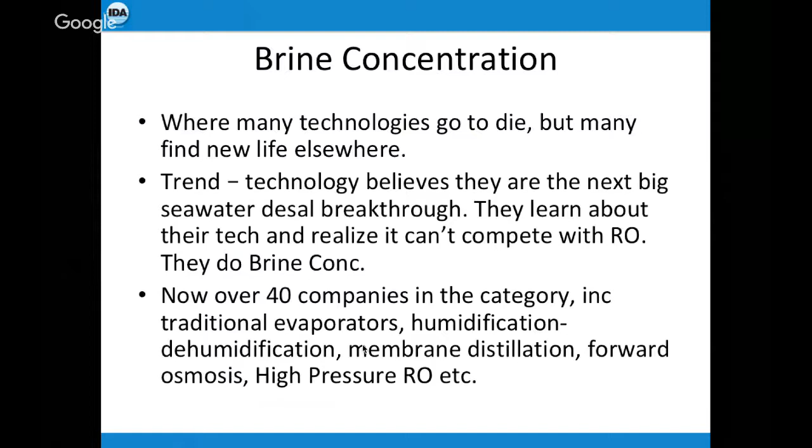So these companies inevitably end up focusing on brine concentration, in that space that reverse osmosis can't really work in all that efficiently. So that 100,000 TDS through 300,000 TDS seems to be the sweet spot that these brine concentration technologies get into that RO can't touch all that well. So over the years, this list of companies has been building up and building up. And Tom Pankratz released a WDR article showing over 40 companies in the category. And they include a whole range of different technologies. So that includes the traditional evaporators, humidification-dehumidification, membrane distillation, forward osmosis, high pressure reverse osmosis. And there's a few others in the niche area as well, but that covers the majority of the techniques that people are using in brine concentration at the moment.

So a key discussion in this area is what happened to forward osmosis. Back in 2008 through 2010, forward osmosis was slated to be the next big thing. And a lot of people, just like I said, were focusing on the seawater market. Particularly Modern Water came out with some very good papers at the 2011 IDA World Congress in Perth. And it seemed to be going okay.

And then in the space between 2010 and 2013, that trend happened where many of them said, oh no, brine concentration is going to be a better way to go. We're not going to be able to compete with RO, so we're going to focus on those higher salinity projects. And in 2013, it was a really exciting space. In fact, we had a YLP webinar on the subject of forward osmosis, and a lot of people tuned in to listen. So people were engaged in the space and were excited about something happening.

At that point, Oasys was slated as being the next big thing. And of course, over the last few months, Oasys has announced that they're closing their doors, or rather, at least they're selling on to another company because the funding has run out for them. So something's happened at Oasys that has meant that getting this brine concentration technology into the market has been very challenging, even though they've seen that there was a huge market in China and had focused over in China quite a lot.

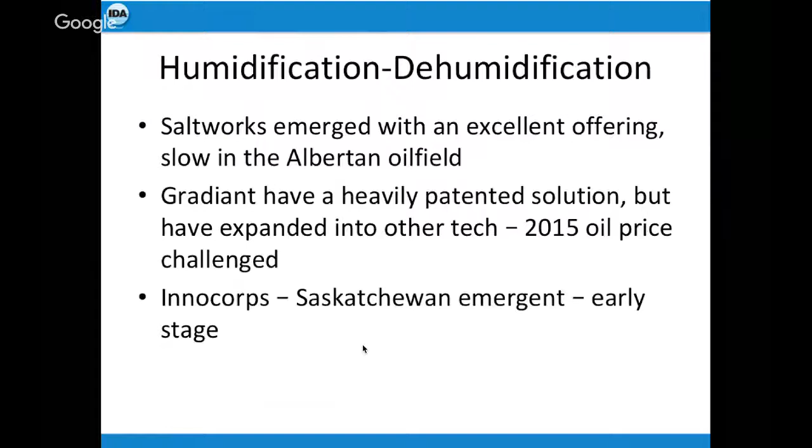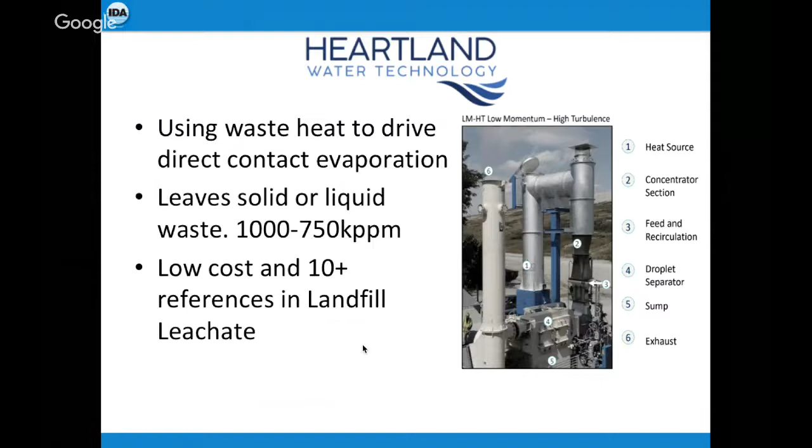So these guys have actually been around for 10 plus years and recently got a new management team that are ex-GE, and those guys are taking it to new heights. So they've already done 10 plus references in landfill leachate applications and have other applications as well, and it's really starting out to go really well for Heartland.

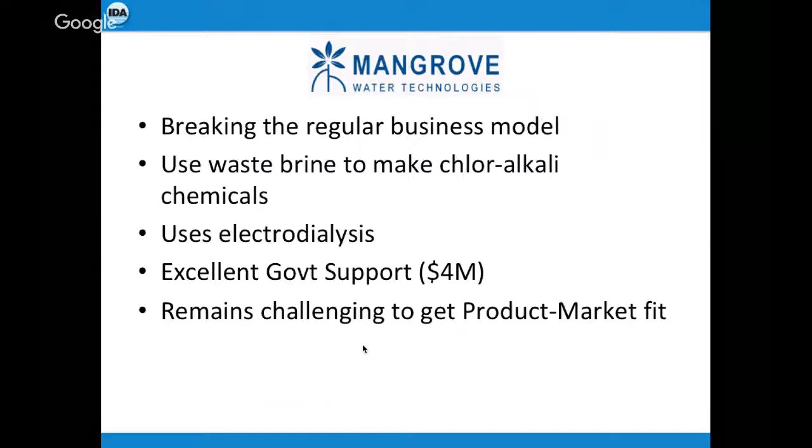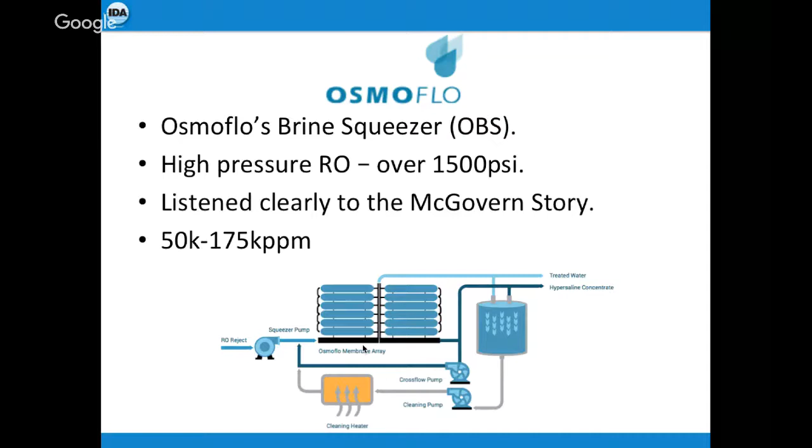Now, 175,000 ppm might not be the be-all and end-all, but the OBS is something that you would put in the front of another brine concentration technology. If you need to go all the way to solid, you would use something like a crystallizer or one of the other technologies. But by putting this in front, it takes the brunt of the work and therefore greatly reduces the amount of energy required in the full system.

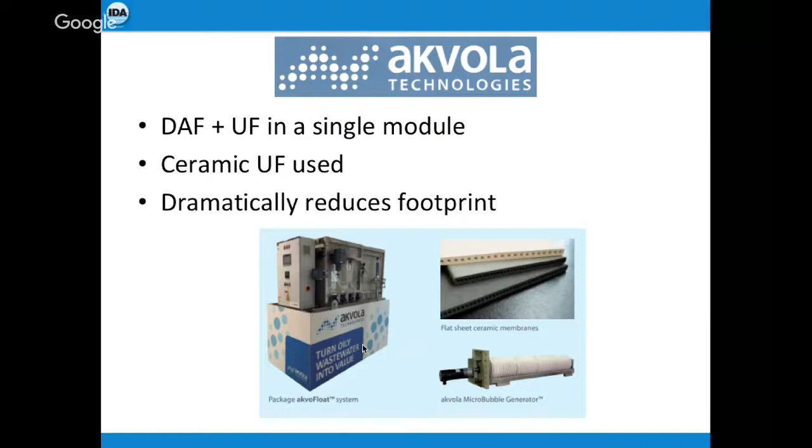Okay, so let's move on to low fouling technologies. There's quite a few in this space. Akvola Technologies out of Germany has a really interesting technology to cut the footprint of the pre-treatment and keep fouling as low as possible. So these guys have dissolved air flotation plus ultrafiltration in a single module using ceramic ultrafiltration modules. So by doing this, it dramatically reduces the footprint, and therefore you're spending much, much less money on preparing your site.

Another one is called Swirltex. These guys create a vortex inside a tubular ultrafiltration membrane. And in addition to that, they inject gas. So by creating that vortex, it means any solids in the material are drawn to the center of the vortex and don't touch the outside of the membrane. So that means that you can go to much, much higher fluxes than a regular UF membrane. In some cases, they've seen up to 5 times the flux that you would see on a regular tubular UF membrane in the applications that they're working in.

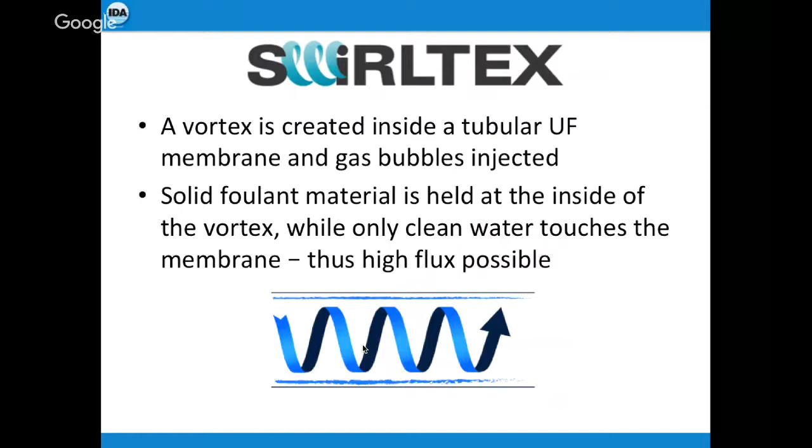So right now they're working in wastewater lagoons, but the application of this technology is great. And I hope over time that they'll see other areas they can get into and really expand the areas they're working in.

Another is Polycera. Polycera is riding on the back of Eric Hoek's success out of NanoH2O and doing very, very well. So their ceramic polymeric ultrafiltration hybrid can get 10x lower costs. So what's really good about it is that it's highly oleophobic, and hence that makes it really excellent to use in oil and gas. So you can see in the diagram below the text here is that the surface repels oil very, very well. So this means that the oil is no longer fouling the membrane, and therefore you can get higher fluxes, but you can also have longer periods between backwashes, longer periods between cleans, and therefore a much, much more efficient system.

So this really solves a problem in ceramic membranes. In places where they've been tried in the oil patch before, the trials have gone really badly due to fouling, and this helps solve that fouling issue. So the surface is neither a polymer nor a metal oxide, it's a true hybrid, so a very, very interesting technology indeed.

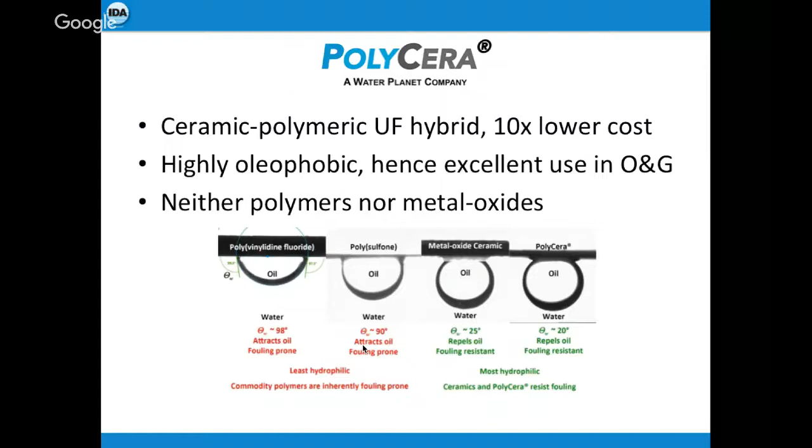So we've got a few membrane companies on the docket today as well. So these guys are really early stage and still developing their membranes. But as we found at NanoH2O, this can be a very long lead time just to get to the point of selling even pilots. So Anfiro has been working on some NF and RO membranes using self-assembling block polymers. So by aligning the polymers, it means there's a straight flow of water, you can see in the diagram on the right there, and thus leading to higher permeability. So because you don't have that tortuous pathway that RO has, you can get these much, much higher fluxes.

And Anfiro are claiming that they want to get up to 3 times increase in permeability compared to regular reverse osmosis. A really big win with these guys is that they're not damaged by chlorine. So that's really going to help the biofouling problem as well. In addition, they're cost competitive with existing materials for roll-to-roll manufacturing, which is really important compared to something like graphene that we're going to get into in a moment.

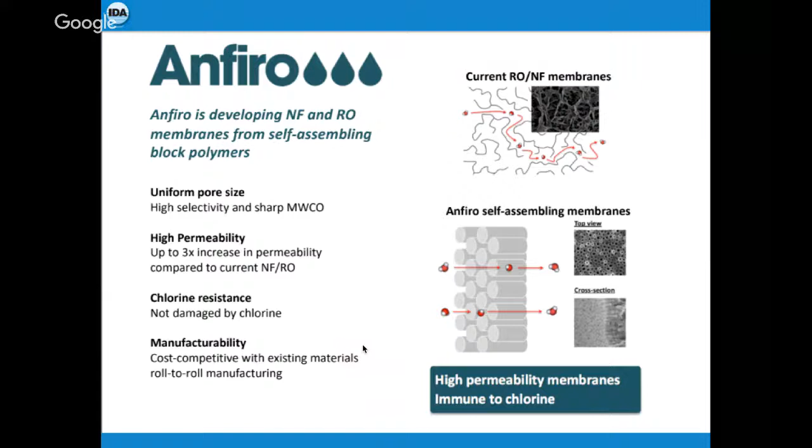Mattershift is another company as well that are looking at new membrane surfaces. These guys are looking at radial aligned carbon nanotubes. So by doing this, you create programmable gateways, only allowing certain substances through. So that really lends itself to desalination, because then you can say, let's tune these gateways to let water through, but not let salt through. And therefore, you can get a really efficient membrane. So these guys are also in the early stages of development as well, but we stay tuned to what they're doing.

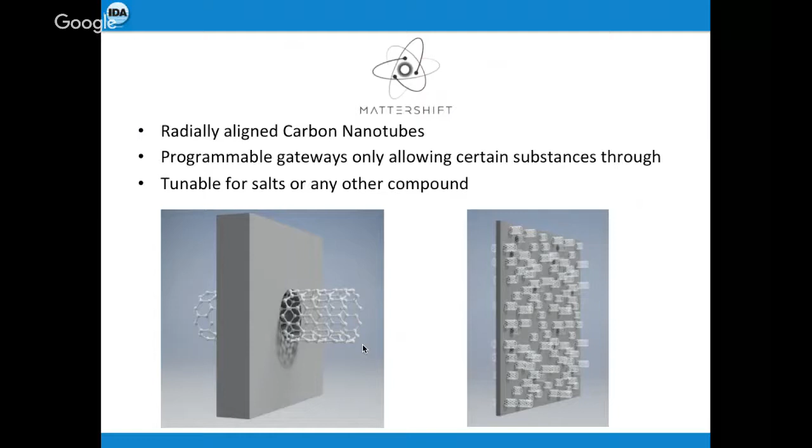So a lot of people have been talking about graphene over the years because it's been slated to increase flux by 10x, or even better than that. So the problem with graphene is that it's been very, very slow to develop. I think 5 years ago, it was slated as 5 years' time. And I don't think that the progress has been made to really get this to the point of being a roll-to-roll or something that can be used at the larger scale.

So Lockheed Martin were really pushing the envelope and were owning the space a few years back and developing things well. Although we haven't heard from Lockheed Martin in at least a couple of years, and it's unclear as to where they're taking this exactly. The other 2 universities that were working on the problem, MIT and University of Manchester, are continuing in the space and making some progress.

So I had a discussion with one of the Manchester teams at the Sao Paulo IDA event, and these guys have now looked at layering graphene inside an epoxy sandwich. So basically they would go graphene surface, epoxy, graphene surface, epoxy, like that, and then make a large block and then shave the top layer off the block, and that becomes the membrane.

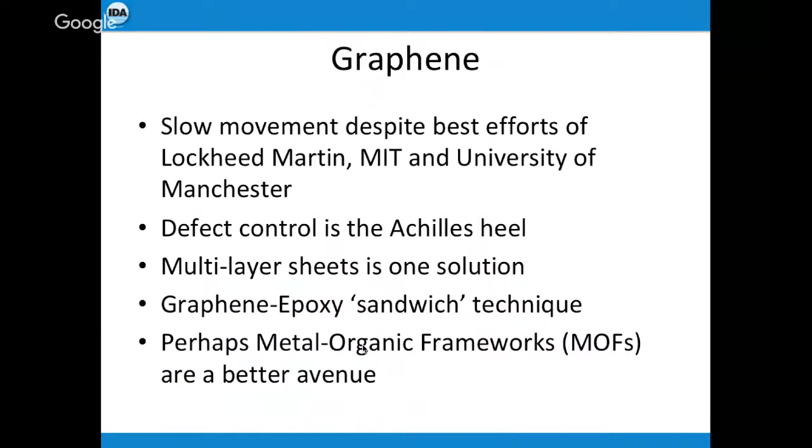Another solution is multi-layering sheets. Because graphene is so thin, it's possible to stack these on top of each other and get the same thickness as an RO membrane. And this takes care of the defect control that is really the Achilles heel of graphene. So we'll see where that goes as well. Over the last few years, another new exciting space has come out, metal organic frameworks. And perhaps this is a better avenue than graphene, although it's early days in that space, and we're all ears to see how that goes.

Okay, so let's move on to low energy pure plays. So one company that's exciting me right now is Pani Energy. So these guys have a technology called adaptive desalination technology, and it's an intelligent seawater RO plant process that adapts to take advantage of the variable demand of fresh water and variable price of electricity. So the process is fairly under wraps at the moment, but it requires a small amount of capital upgrade and then some proprietary algorithms to control intelligently what's going on the plant and balancing flows between certain areas of the plant.

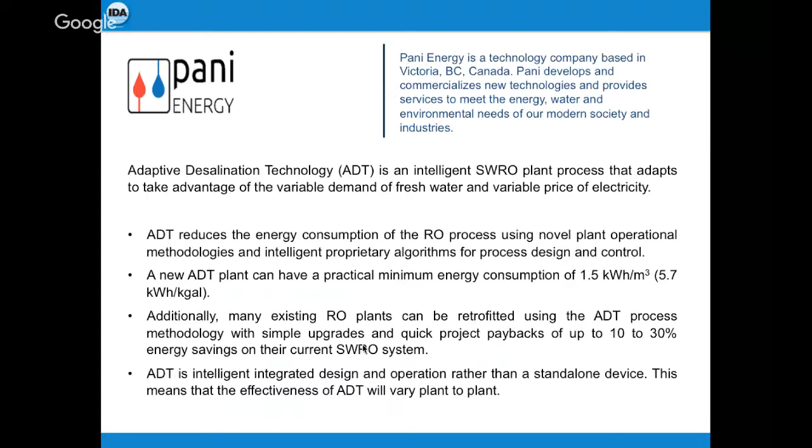So research has been going on at Victoria University in British Columbia on this for quite some time, and they claim that the minimum energy consumption of their system is greatly improved compared to standard at comparable salinities. So these guys are really getting into the space now, looking at some pilots, and I really hope something goes well here, because I think there's good potential here after it's been proven in a first and second pilot.

Another way of looking at things is changing the flow-through nature of RO and focusing on batch and semi-batch processes to greatly enhance the energy. So this really requires a serious mindset change, as does Pani Energy as well, in that if we do things slightly differently and we construct and design our plants slightly differently, then we can save a lot of energy. But this requires quite a lot of proving period to get to the point of the industry being comfortable with what's going on the research side.

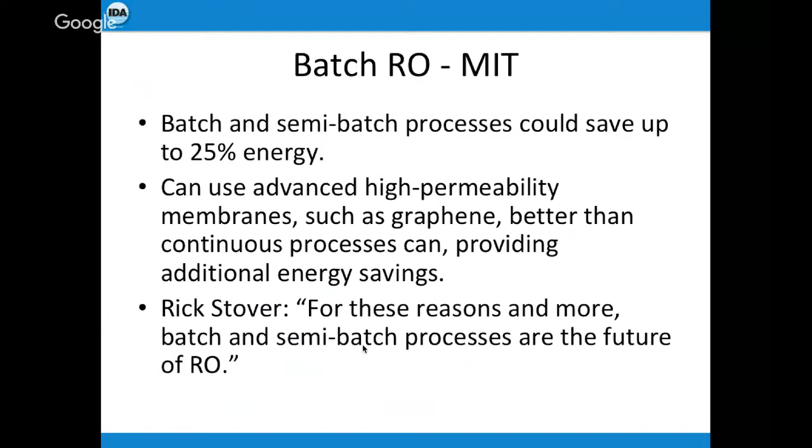So batch and semi-batch, and by semi-batch I mean things like Desalitech technology, could save up to 25% of energy uses. It can also harness some of the high permeability membranes like graphene that we talked about previously, and provide a better process than that continuous process for energy savings. So on batch RO, Rick Stover was quoted to say that for these reasons and more, batch and semi-batch processes are the future of RO. So there's quite a few people who are quite respected in the industry that are looking at batch RO to say, hey, this really could be the latest and greatest in desal technology.

So there's two more potential technologies that I wanted to talk to you about today. One is Moleaer. So Moleaer is a nanobubble generator. So this can be used to greatly enhance the efficiencies of a lot of different technologies. Most importantly for desal is in dissolved air flotation. So these guys inserted their system in place of a DAF pump and found it much, much more efficient than a DAF pump for creating the bubbles in a DAF system. So what Moleaer does really well is inject oxygen into systems to change the parameters within them.

So for example, you could install this in an effluent lagoon or a lake and cut down algae growth. Or they've also been using it in food production, which is really interesting, and increasing yields of things like leafy green vegetable growing. So it's an exciting space. It's not just exciting for helping desal technologies, but a lot of other technologies as well. And it just happens to be the ex-Nano H2O team. So in terms of startups, those guys know what they're doing.

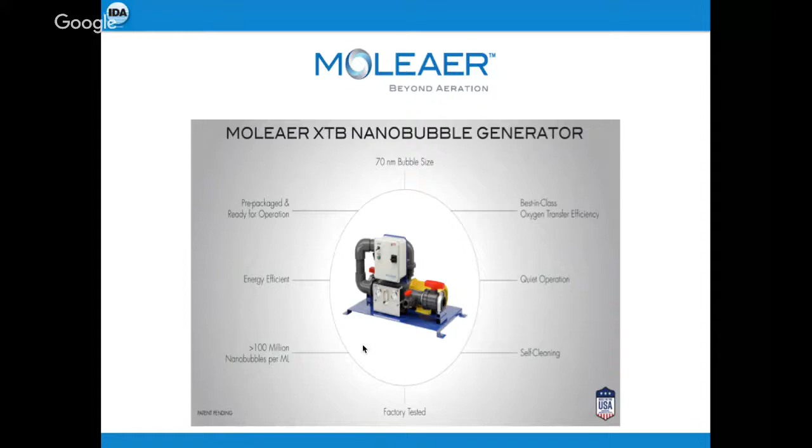The final technology today is Xedia Process Solutions. So these guys aren't really focused on desalination per se, but in treatment systems in oil and gas. So within an oil and gas system, you may have a downstream desalination technology of a walnut shell filter. So this is helping the system as a whole. So these guys have modified walnut shell media filters. And in oil and gas, walnut shells are used to remove oil in water and any hydrocarbons in the water so that the water can be reused and other applications as well. The really good thing that I like about this technology is you remove your walnut shell filters and insert these modified filters.

So it's a very easy technology to pilot for companies. It's not a case of installing a whole heap of new steel in the ground. It's simply take out your old media, put in the new media, and if you like it, keep it, and we'll keep servicing the technology.

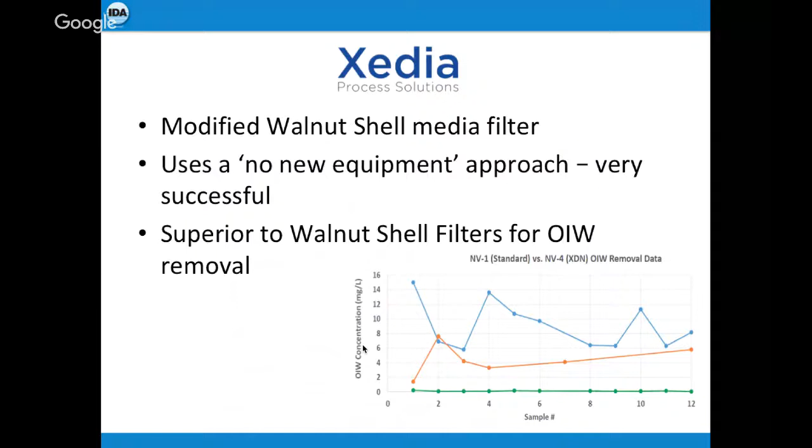Okay, so that brings me to the end of the presentation today. I'm going to go through a very quick synopsis now of my feelings for new technology in the desalination space. So first and foremost is we don't need any more forward osmosis companies. As I talked about, the companies that exist now are looking at all sides of the forward osmosis story. They're looking at the draw solution. They're looking at new towers for recovering the solution. They're looking at modules. So I think we've got all of our bases covered as an industry there.

A point I wanted to make about brine concentration companies is that there's a lot of companies in this space. So if you're a brine concentration technology and you're trying to get into the space, you better be 10 times better than everybody else. Now, 10x is something that gets thrown around Silicon Valley. Realistically, in desal, we're working against the realism of thermodynamics, and you might only be able to get 10% or 20% better, but you better be 20% better than the best brine concentration technology, not 20% better than evaporators and crystallizers.

And my last point is that energy-saving pure plays are really exciting. And I think anytime someone comes out with this, it gains attention. But it's most likely going to require a mindset change on our behalf as desalters on the way that we do things. And this is really similar to the pressure exchanger. Previously, the way that we did things piping-wise on an RO system was very different to the way that we do systems with a pressure exchanger now, but we had to change our mindset to allow for that.